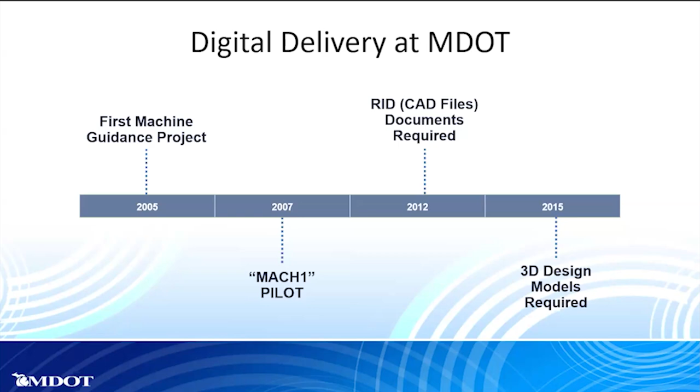But looking back at this 2007 Mach 1 pilot, there's a lot of interesting stuff that I found going back and looking at the proposal and talking with people from MDOT. The first thing that I thought was interesting is that we actually required the contractor to use automated machine guidance.

Usually we try to stay away from things like means and methods, but in this case, we actually told the contractor, hey, you need to invest probably hundreds of thousands of dollars in equipment in order to pilot this technology for us, which I'm sure we got charged for. It's interesting that this is the route we went, when a lot of times we try to stay away from means and methods type stuff.

The other thing I found really interesting about this project is that the same files we delivered to the contractor, 2D CAD files, 3D digital terrain models in LandXML format, it's literally the exact same file types that we deliver today, at least for the purposes of automated machine guidance. When we get into model as a legal document and things like that, that's a little bit different type of information.

But as far as surface information and AMG, same exact file types we were working with back in 2007. And I got a chance to talk to the person who made the 3D model for this project, who still works for MDOT. And he said on the contractor side of things, the project went horribly, which I thought was hilarious.

I guess the contractor couldn't get any of their equipment to talk to our CORS network, which allows you to get really highly accurate GPS signals. So a lot of the project actually ended up being staked conventionally by hand. But they did end up getting their AMG equipment working. I'm not sure exactly what the issue was.

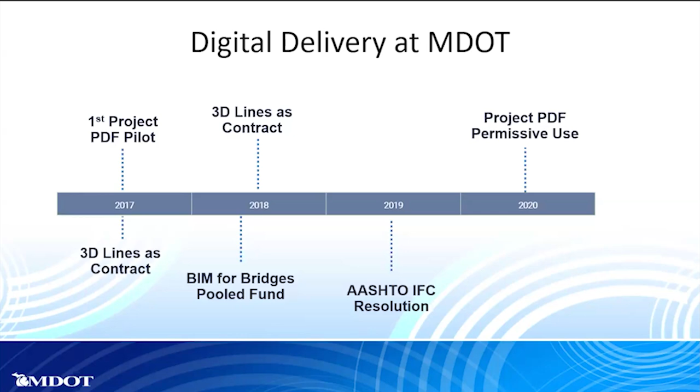I think we have another timeline of some of the more recent pilots as we get into Melissa's portion of the presentation. But I did want to start out by talking a little bit about some of our project PDF pilots. The idea of these pilot projects was to not think of a sheet of paper as an 11 by 17 thing you print out and carry around on the job site, but think of a PDF as more of a digital format or a model where you could see the entire project all at once.

And so that's kind of what this picture is illustrating here, is that basically we took away the limits of the size of a sheet, or the size of the digital sheet of paper that you could put on a project.

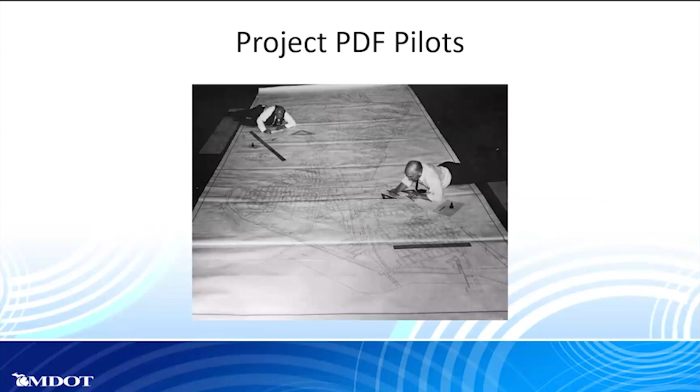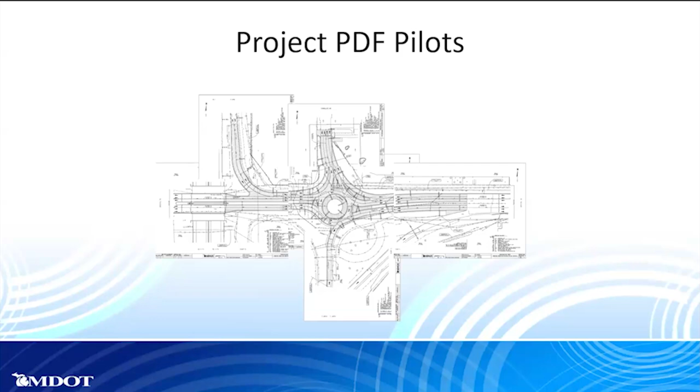I think here we have a little video. This was one of our initial pilot projects where we actually were trying to take this thing to the next level, where it was almost like being in CAD. You can see we have different design files and different layers that you can toggle on and off, kind of like being in CAD software. So you can print those things to PDF.

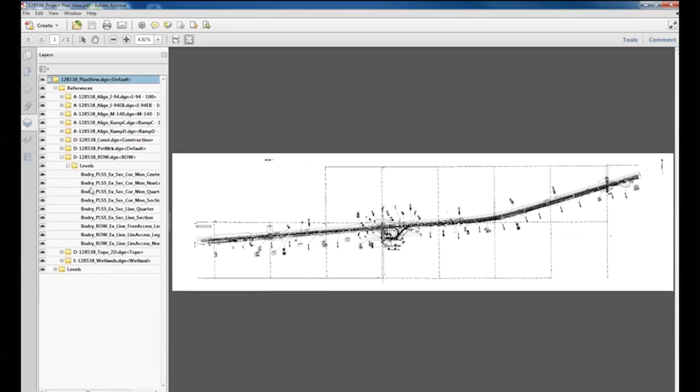We also had these different layer groups, which was really cool. If I go along in the video a little bit, it kind of grouped a sheet of paper based on location or even based on work type. So this is just one PDF that you can very quickly flip between the removal details, the construction details, the pavement marking details, things like that.

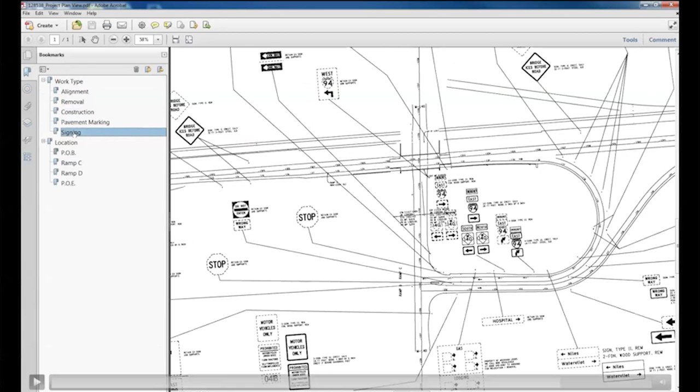Now, what we learned really quickly on these pilot projects is that PDF is not the right way to show some of this information, especially with all these layers. I think I have a slide showing this later, but basically what we found is that the mobile technology at the time, iPads, phones, and even laptops that were not of a certain horsepower, the PDF software really struggled to render all of these layers, and it actually changed the way that we printed a lot of our pilots. So I would say these early pilots, while successful, definitely weren't perfect, and there were things we could improve upon.

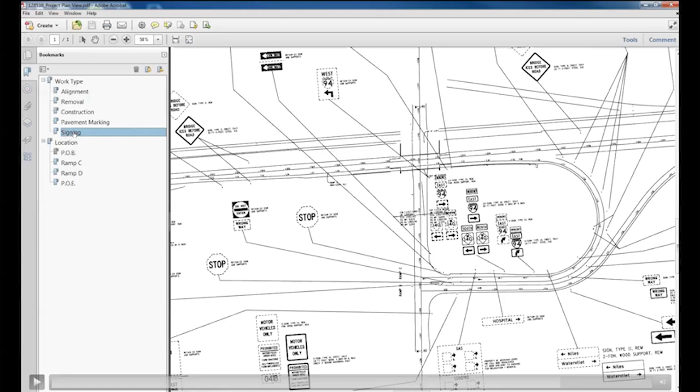So definitely, I would say talk to us if you're thinking of doing pilot projects involving strip maps or really, really large pieces of paper, and we can give you certainly a lot more feedback than I can fit into a 15-minute presentation here.

But overall, some of the early feedback that we got, the designers love it. Drafting time was significantly reduced as far as the amount of time and effort it took to put labels on plans. Estimators and office staff, for the most part, really liked it. We heard from a lot of estimators that said it saved them time. Being able to visualize, especially the staging details and traffic and things like that, was really, really nice. And they didn't have to tape the plan sheets together, which was cool.

Although a lot of times this still wasn't being done necessarily in a digital environment. It was the office staff literally printing out 200-inch sheets of paper and taping it on the wall. So while we initially envisioned this as being kind of a digital process, it really was still a paper process in a lot of ways.

Whoops, hit the wrong button there. Let me go to my next slide.

Some feedback from the field staff: the tablets that we had in 2017 definitely could not handle the layers. We had iPads that were running out of memory, and our construction staff basically had to use their laptops instead of some of their mobile devices. So definitely, like I said before, trying to print all of those layers to a PDF file, it's just not meant for that, at least not on a big 200-inch sheet of paper.

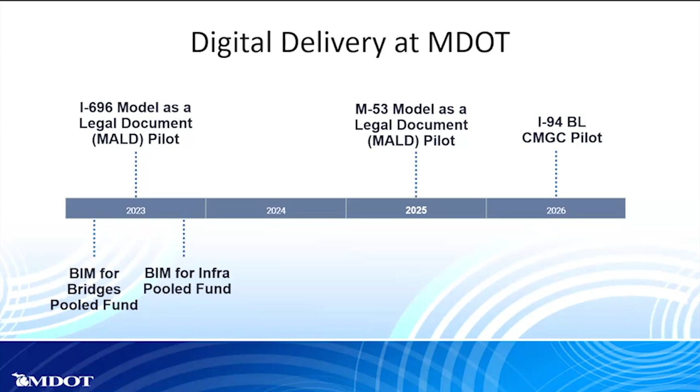But learning from those early pilots, and the work for the BIM for Bridges Pooled Fund, which Brad Wagner is part of and is helping with this presentation, led us to our first model as a legal document pilot on I-696, and our second on M53, which Melissa is going to present about. I'm going to quickly go through some of the feedback we got on the I-696 pilot, since we're limited on time.

The scope of work for this project was replacing a 3-span steel plate girder bridge with a single-span bulb T-beam bridge over the Rouge River in the metro Detroit area of Michigan. This was part of a larger road reconstruction project, which included 8.5 miles of road work and 10 bridges being rehabilitated. The model as a legal document portion only applied to this one bridge; the rest of the project had conventional plans.

This project was let in August of 2022, and construction actually just finished up last winter in 2024. We've had a lot of good feedback doing after-action reviews with the contractor and things like that.

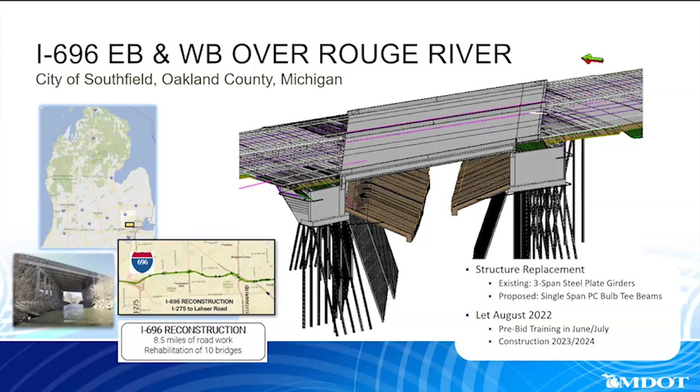As far as the feedback we got on this project, we're going to show the deliverables here. But if I could give any advice to other DOTs thinking about doing this, this next slide is probably the most important one.

Number one, we had the designer on board through construction of the project. Part of their responsibility was updating the 3D model, doing training with the contractor, and capturing lessons learned, so that our next pilot would be even better. Definitely a lot of time and effort was invested into this project, and I wouldn't say we were expecting to save a bunch of money. We wanted to do it the right way and make sure we had the right coordination and the right people in place to make the job successful.

The other thing was the model coordination and training special provision we included in the contract, which required the contractor to develop a BIM execution plan. We had bi-weekly meetings about work being done using the 3D model in the field. It required them to capture lessons learned and give us a presentation at the end of the project. Some extra effort on the contractor side, and things we inspected, just to ensure the project went well. Definitely worth it on our first pilot project, where we didn't really know what to expect. The coordination and partnership between MDOT, the contractor, field staff, survey staff, and construction staff was something everyone agreed went really well on this project, and I think this special provision was a big part of that.

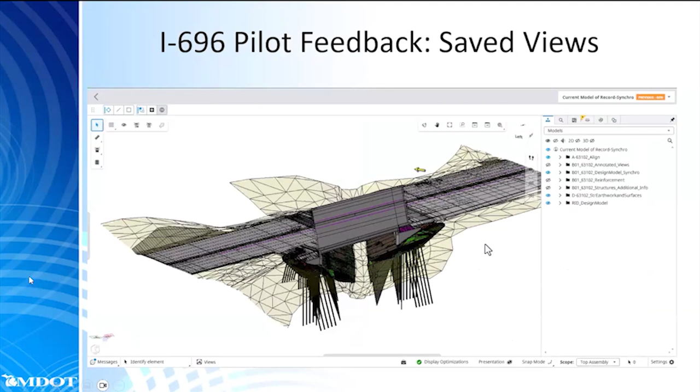So I'll try to get through this as quickly as possible. The software that we used for the model viewer on this project was a Bentley product known as Bentley Synchro. This is just a little video showing that product in action.

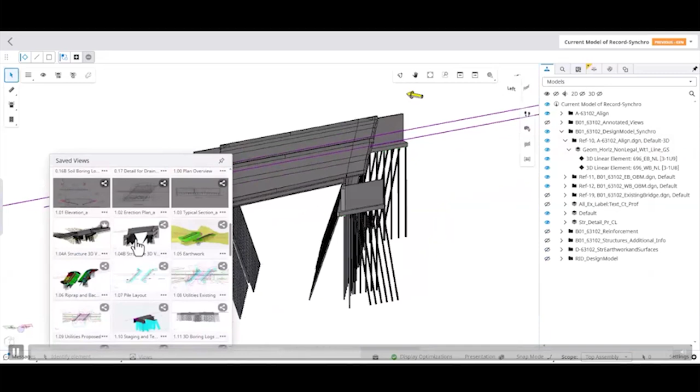One of the things the design teams learned quickly is that expecting a contractor, or somebody not familiar with our CAD standards, to toggle on and off individual layers or files is not really feasible. So what Synchro allowed us to do is create saved views where it was the designer's responsibility to turn layers on and off and give the contractor the typical views they would be used to seeing, kind of mimicking what a plan set would look like, but in a 3D environment.

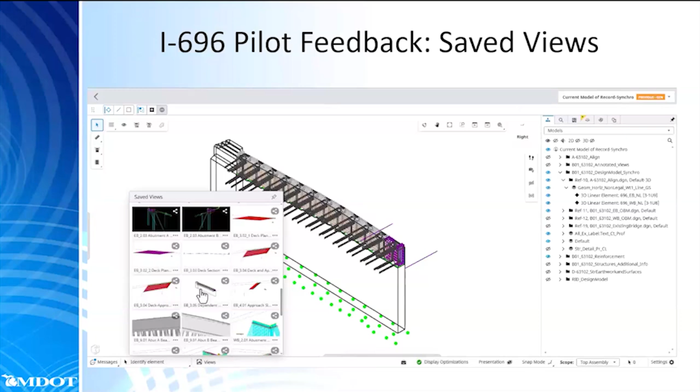Having these saved views was something the contractor pointed to as being really valuable. They said on future projects, they would want these saved views to be more standardized, and maybe even have more of them on a typical project.

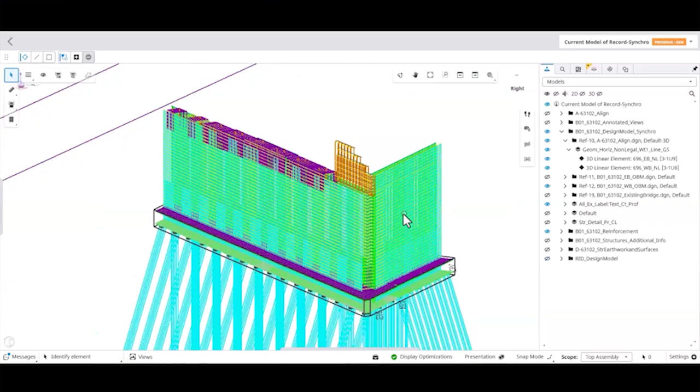The other thing that went really well on the field side of things was this idea of data visualization. Again, this is something the model viewer we used on this project, Synchro, can do. It's basically this idea that when you're in a 3D environment with things that have properties, the idea of toggling layers on and off is almost a foreign concept. It doesn't even matter - you can toggle things on and off based on their properties.

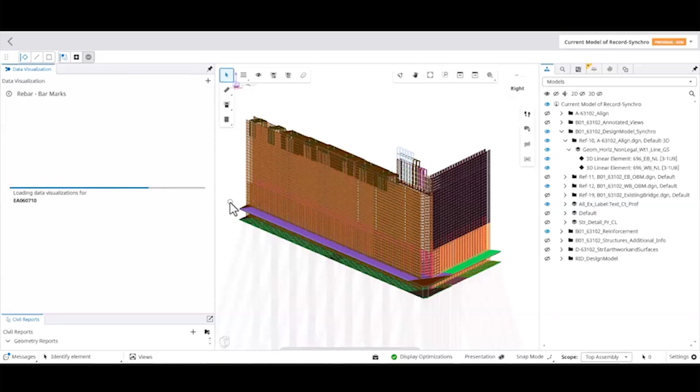So that's what we're showing in this little visual - we have a whole big mess of 3D reinforcement on this bridge abutment, and it's basically impossible to see when you have all of the reinforcement turned on. But one of the things the design team did on this project is they tagged, as an additional property, what the MDOT bar mark was for that particular reinforcement.

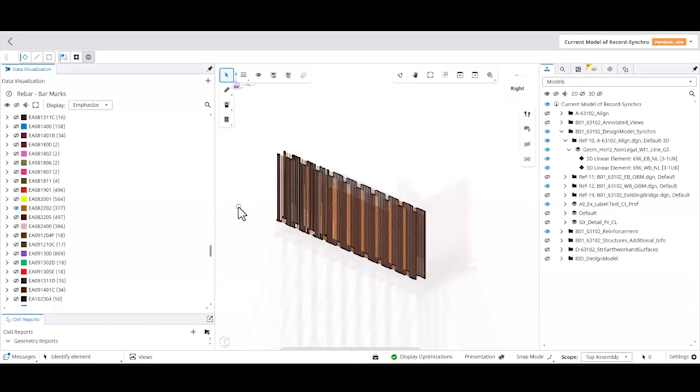By doing things this way, I can go in and turn on an individual bar mark and look at things a little bit different, where it grays out most of the model, and I can just really get into the details and see exactly what it is that I want to see. So definitely the data visualization, and doing as much as you can with extra attribution in the model, is something that can really add value to a model as a legal document project.

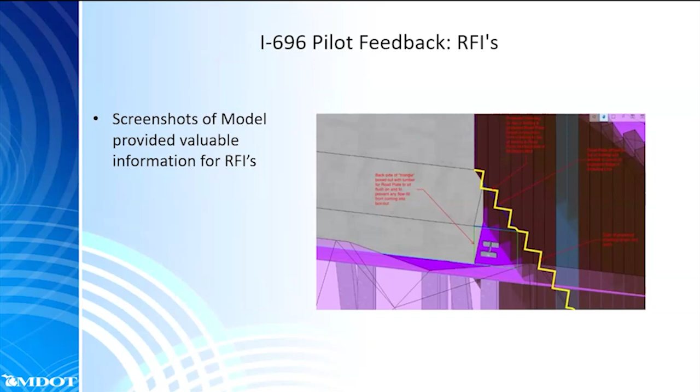Another thing the contractor said is they found the RFI process a lot easier to communicate what they wanted, and really this was just having the 3D model that improved that. We didn't change our RFI process from what it normally is, but the contractor was able to get into the 3D model, take screenshots of exactly what it was that they were looking at, and provide some additional context for the design team or whoever was reviewing those RFIs. So I thought that was an interesting piece of feedback from the contractor.

As far as some of the opportunities, or some of the things that didn't go as well on the project, I don't want to paint a picture like this was all the perfect pilot project where there were no issues and we can't do anything better.

Certainly, the contractor said that getting bids from subs was really, really difficult. And remember, this was just one bridge out of a much larger project. During the bidding phase, they said they had to essentially take screenshots of the model or do their own quantity takeoffs to provide subs, where it was a lot of extra work on the prime contractor to get bids during bidding time.

Another thing we found is that for construction staff, whether it's an inspector or somebody from the contractor's team, the idea that you could take an iPad or some kind of mobile device and take measurements in the field of the 3D model - it's really not feasible. And it's not even that you don't have enough screen real estate or anything like that, it's just being able to take your finger and snap exactly on a point in the 3D model and be confident that you're getting to the right spot. We found that it's just really not feasible.

And even in the screenshot, I'm not sure how well you can see here, but you get little oddities like this, where you have something measured at 4.001 feet. Well, that's probably not what it's supposed to be - it's probably supposed to be 4 feet, and not whatever kind of rounding issue is going on here. So little things with the model viewer like that, too, we found to be an issue.

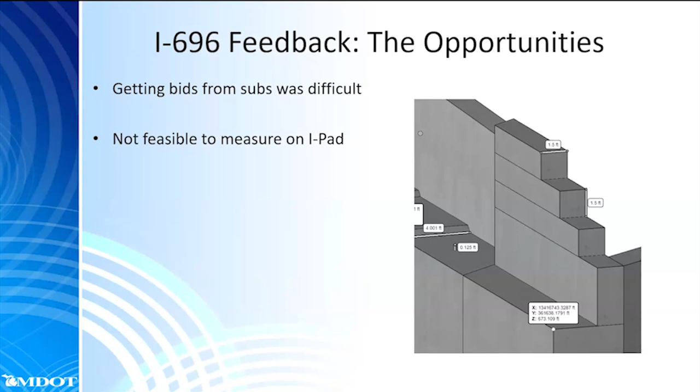Another thing that the contractor said would have been helpful is having more 2D annotated views. I think this goes back to the same point as before: having a 3D model with no annotations isn't really feasible in the field on a mobile device, to go in and take your own measurements and be confident in it. So this thing that looks like a plan sheet on the screen was something included in the model for this project.

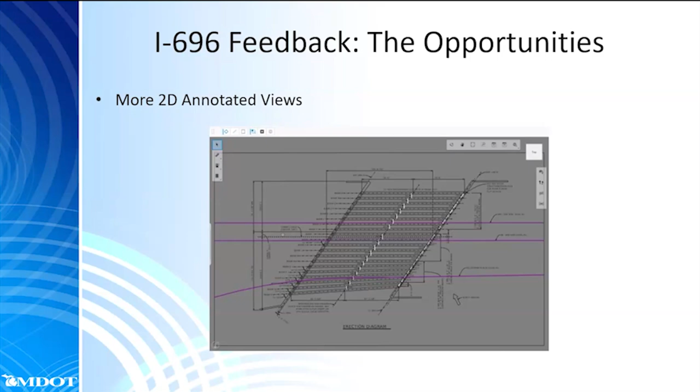Basically, it is the 3D model that you're looking at, it's just been modified to look more like a plan sheet, with actual dimensions and annotations put on it. So something that looks a little more like a conventional plan sheet, maybe not for everything in a typical project, but for a lot of the work, having more of those 2D annotated views was something they pointed to.

Overall, just a summary of the feedback. I think partnership is really important if you're doing any kind of pilot projects. That was a big reason why we were successful on 696, because of the attitude and the partnership that every party brought to that project.

In general, the office staff is really flexible with the deliverable you give them. On the field staff side, it's a little more of a challenge. Things are slow to load on mobile devices, and if you don't have internet connection, that can make things difficult. Overall, I think for the most part, field staff feedback has been that it's more difficult to navigate than a traditional set of plans.

So from my perspective, being part of these different pilot projects, I think it's really important for the plans and the model to work together. This is kind of the simplest example I can think of.

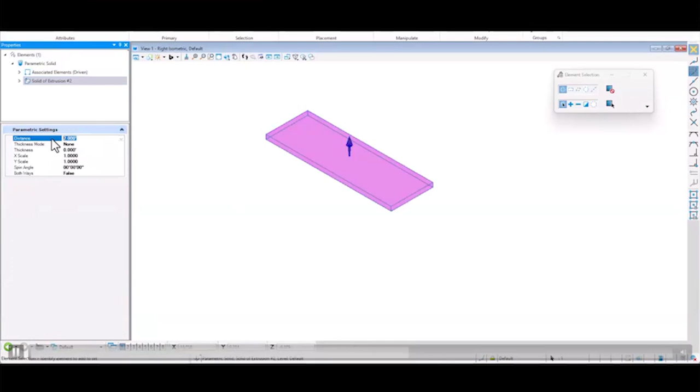We have a nice isometric view, a plan view, and a top view, but everything is linked to the model. So if you change anything in the model - where I just changed this footing from 2 feet to 3 feet - your annotations are all adaptive and update with it.

So the idea of parametric modeling and parametric plans is something I would support, and I think is potentially another way of delivering things in the future, where instead of getting rid of all the plan sheets, you have this hybrid mix where the plans and the 3D model work together.

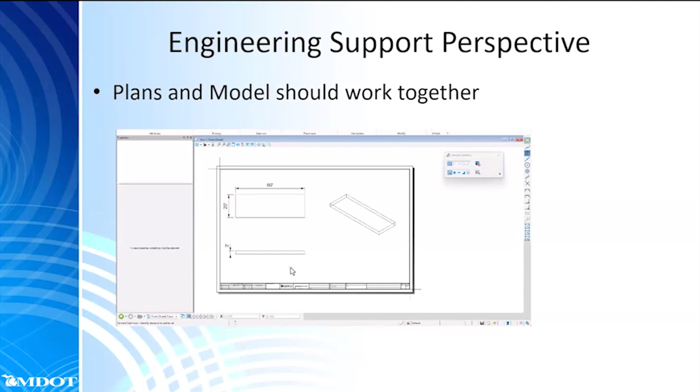So with that, I think I'm going to turn things over to Melissa to talk about our second model as a legal document project on M53.

Do you see my screen okay? I do not think I see it yet. I stopped the share on my end, might try resharing. Yep, we got it now.

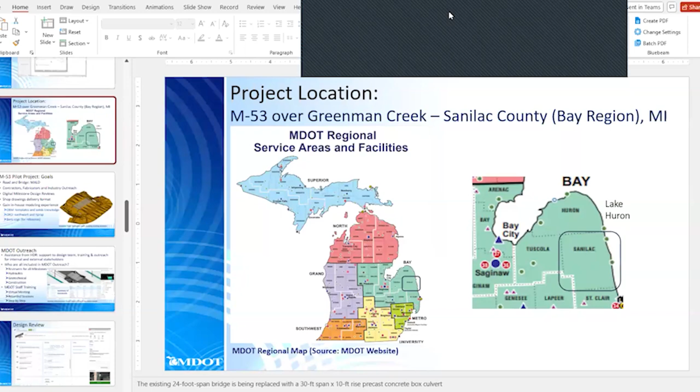Okay, I'm going to give a brief overview of where we're at with our second pilot project, location, type of structure, and we're going to also discuss external and internal stakeholder engagement.

Michigan Department of Transportation is composed of 7 regions. The project is located on M53 over Greenman Creek in Sanilac County, which is part of the Bay region. This county is just next to Lake Huron, so it's on the east side of the state. It's a little bit of a rural area.

In order to get the Transportation Service Center on board, and the region, we did some testing on internet connectivity that was successful, and that helped us get the buy-in we needed from the region and the construction office. The existing structure is a 24-foot span bridge that will be replaced with a precast concrete culvert of 30-foot span and 10-foot rise.

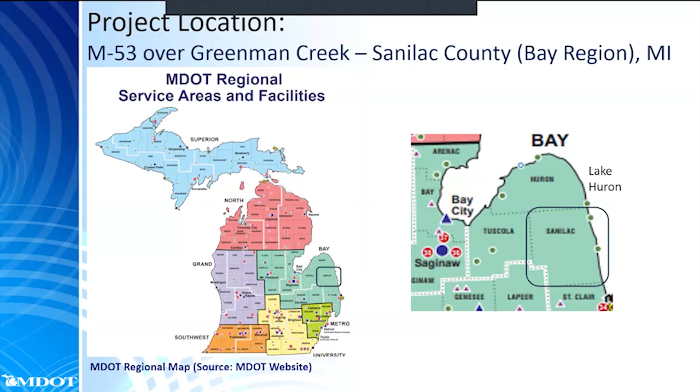Some of the goals for our project are that, as Luke mentioned, the 696 project and MALD included just the bridge. Here, we want the road and the bridge to be part of the contract, the legal contract. And so that's what we're working on.

As part of this project, we have started engaging industry, contractors, and fabricators. We have also implemented digital milestone design reviews utilizing Bentley Infrastructure Cloud.

We want to gain knowledge and establish how the shop drawings delivery format and process needs to look for this project, as we will be requesting them, and they are required for the precast concrete culvert. Shop drawings are required in all culvert projects.

We want to gain in-house modeling experience utilizing OpenBridge Modeler, using templates and solids. We also want to gain more experience with ORD doing earthwork and riprap at these bridges over water.

We are planning to include the boring logs as part of the reference, for information only. The boring logs in 3D are not going to be contractual, but they will be part of the reference information documentation that we provide with every project.

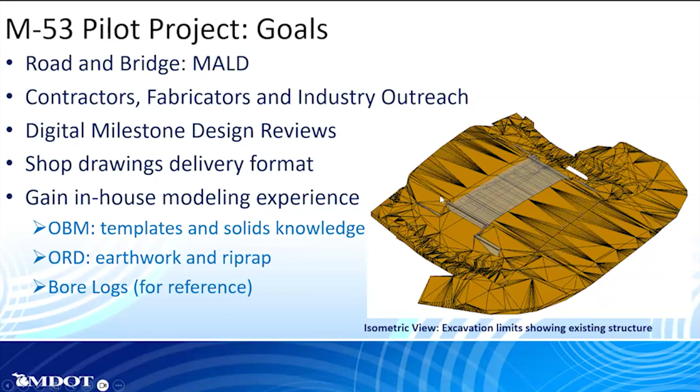In this figure, we can see we're showing the excavation limits and the existing structure, which was also modeled in 3D.

As part of the MDOT outreach, we have assistance from HDR. They are our consultant partners. They are not doing the design, and they will not be the engineer of record.

However, they are supporting our bridge design team with training, and also assisting with training and outreach for internal and external stakeholders. As part of MDOT outreach, we have been having training and conversations with the reviewers for all milestones during the design process - our hydraulics unit, our geotechnical unit, and the construction staff as well.

How have we delivered this training? A lot of our work nowadays is done in a virtual environment that allows us to reach more people all across the state, in our case.

So we provided initial virtual meetings, separated into two different sessions. The sessions were recorded and made available to everyone, so they could go back to those recordings and work at their own pace.

Also, this helped us prepare documentation with step-by-step procedures to use the Bentley Infrastructure Cloud, and how to look at the model, what they're looking at.

Here we have a screenshot coming from the Bentley Infrastructure Cloud, which is a web-based platform, from one of our review sessions. This is just a summary of the comments, and on the right side is the properties of the elements that were selected in the model at the time we took the screenshot.

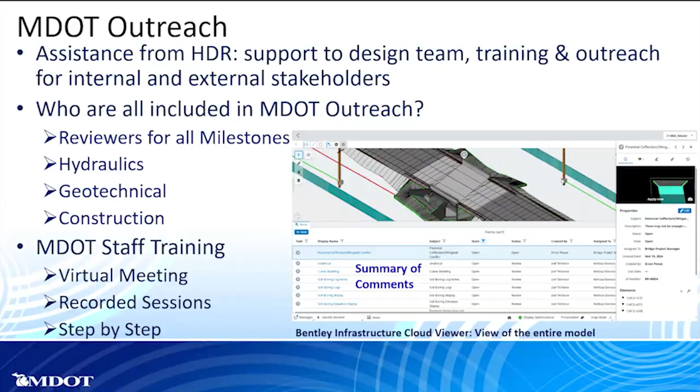This is more of Infrastructure Cloud. We're showing a lot of it because that's what we're using for the design review, not just for the milestone, but also for internal reviews when we need to seek clarification from our hydraulics unit or our geotechnical unit, for example. This is just showing a summary of recent activities of whoever is reviewing it.

Because you need to have a login in order to get into this session, right? And then just a summary of what the comment was. We can tag a location to that comment so that we can have subsequent discussions if it's something that needs to be further discussed.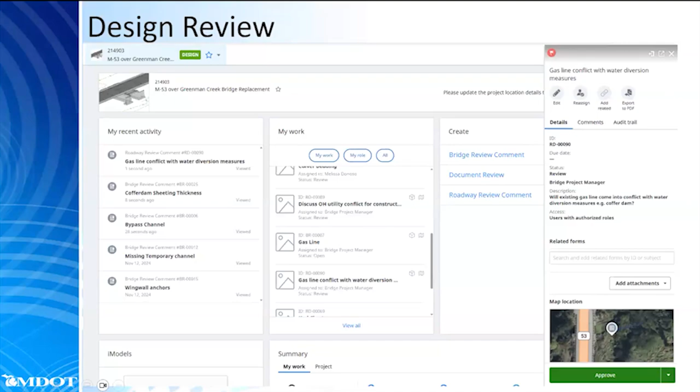As part of our external stakeholder outreach, we also include our state partners, EGLE - the Environment, Great Lakes, and Energy, formerly DEQ. We reached out to them to see if they would have the time and we could get them on board as part of the permit application required for this project, being over water. Due to short staffing, they cannot do the review and learn the process for this project.

So what we proceeded to do for the permit application is create digital sheets, similar to what Luke showed on the 696 project. These digital sheets are created from the model and not annotated in the model, but we can convert them into PDF files. Our intention is to provide key information on our project - what we're doing, the location of the culvert, the realignment of the culvert - but we are not intending to duplicate traditional 2D PDF sheets.

In addition, we have reached out to contractors, fabricators, and industry in general, because we want to make them aware of the project ahead. We want to seek input and feedback - what works, what doesn't work - from them. Similar to the 696 project, there will be a mandatory pre-bid training during the advertisement phase of this project. At this time, the project is scheduled for a September 2025 letting with 2026 construction.

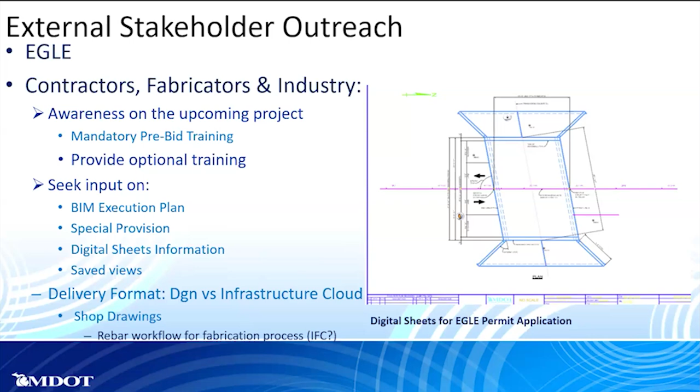So how are we spreading the word, and how are we doing this outreach for stakeholders, contractors, and industry in general? So we are doing webinars. Our first webinar was second week of February, and it was an introduction to the project. We are also engaging with MITA, which is the Michigan Infrastructure and Transportation Association, to assist us with their press release to share the upcoming engagements.

We have been putting together, and HDR has been a tremendous partner with us on these. We are putting together an email contact list. So anyone in that contact list is receiving information about upcoming engagement webinars. We are also doing, via our MDOT e-Proposal, what we call a contractor announcement. It is tied to current letting, and then we are putting information there.

We're also doing, as I mentioned earlier, GovDelivery emails. This is just a snapshot of what it looks like. Just give them an intro to the project, some of the goals of the project, and then it goes into upcoming engagements. We have a calendar appointment, with the series of appointments that we have planned thus far, so that they can have that on their calendars in advance.

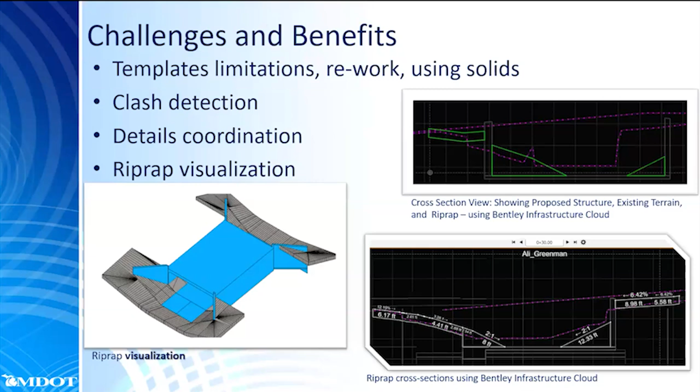We had a lot of back and forth with our hydraulics unit, because there were concerns about us filling in the existing stream bed. So after some additional communication using the model, showing it through Bentley Infrastructure Cloud, cutting cross sections using Bentley Infrastructure Cloud as well, we were able to determine that it was best to reduce the rise of the culvert and do some adjusting with the slopes in order to avoid filling in the existing stream that could cause an adverse effect.

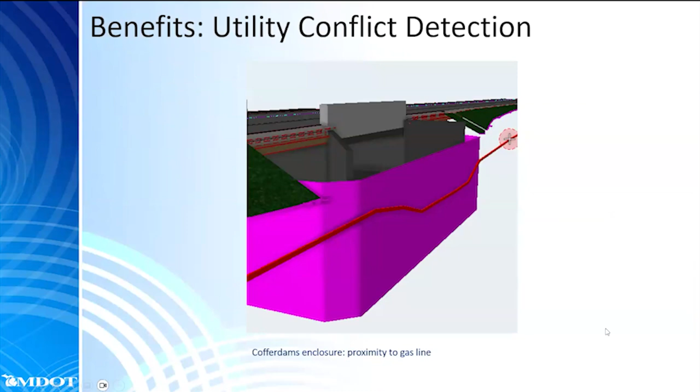As part of the clash detection, we found out that the existing gas line is in close proximity to the temporary cofferdams enclosure for the construction of the project. So this gas line now needs to be relocated, so there is no conflict or close to a conflict, and we comply with MIOSHA requirements.

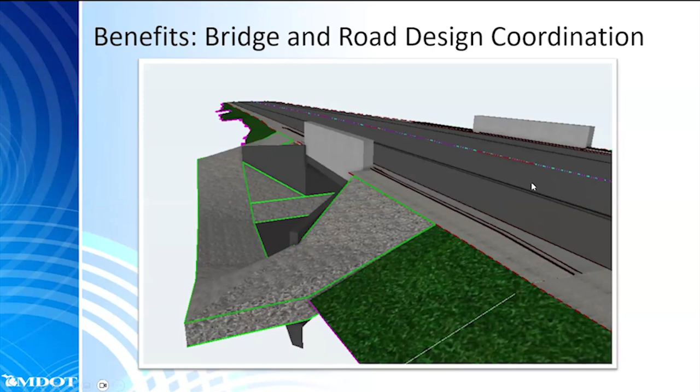As part of the coordination, bridge and road design have been coordinated throughout the entire project. We have a container file with all the sub-files being referenced to it, so everyone can see the most up-to-date information. But we also needed to do some subsequent coordination on shoulder elevations, which helped us determine the wing wall heights and lengths needed to ensure it would work out with the new shoulder location, widths and elevation. So that was very useful and helpful to have a 3D model to go through that.

Another benefit is asset management. We're still getting more into what we do with these, how we're going to have a living document. It's going to help with inspections, with future work that's going to be done. And then hopefully once AASHTO Open API is up and running and the case studies have taken place, we can see how we can exchange data between an OBM ORD model to AASHTO Bridge Management, or AASHTOWare BrM. So we're still looking into that, more to come, but this is some of the things we have done thus far with our second pilot project, and now I will pass it on to Brett.

I think we're running a little bit tight on time, so I'll do my best to go fast.

I want to zoom out and look at the 30,000-foot view of this whole discussion. I think these pilot projects that Melissa and Luke have talked about are pretty awesome, pretty innovative, we're doing some great things. But really, they represent an advancement in just one small area or one small piece of the overall life of our transportation assets. Really one link, if you will.

And I want to touch on several other efforts that we have ongoing related to data-centric workflows.

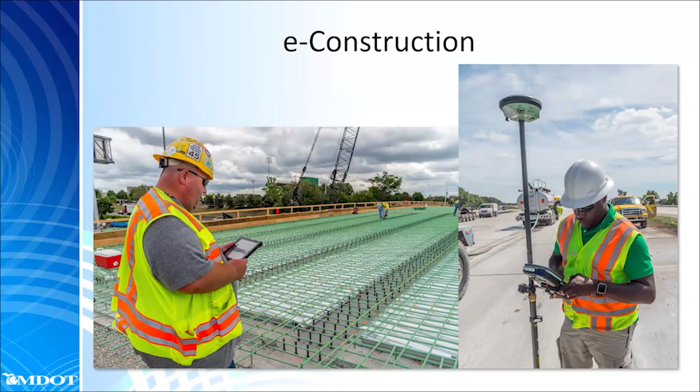Back in 2015, one of the EDC-3 initiatives was e-construction. At that time, MDOT was fairly well down the road in terms of implementing e-construction, and a lot of our practices were showcased. While e-construction is really just an electronic emulation of what we used to do via paper, it really forced people to think about workflows, particularly standardizing and repeatable workflows, which is super important in order to ensure the integrity of data as we expect things to get used by others.

Another thing we just wrapped up last year is our construction tools research project. This one was pretty neat. It looked into the needs and use cases for digitalization, particularly as it pertains to our construction staff and field uses in construction. This project really highlighted how our workforce is changing, and how the demands of our younger generations, how they think and learn, is conducive to working electronically, and really expected, for what it's worth.

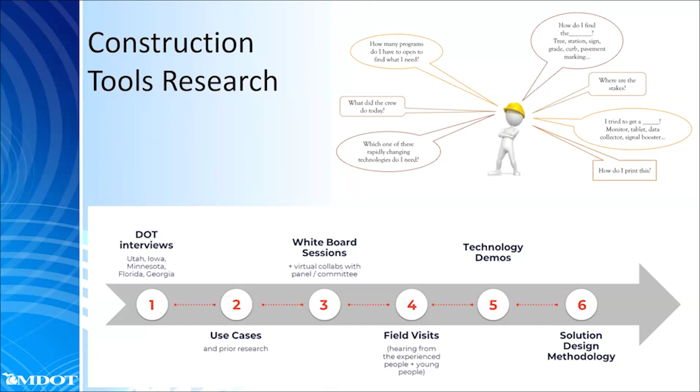One takeaway from this is our field folks, like probably everybody, are getting bombarded from every direction with new tools and technology, which leads to a lot of challenges and questions. The project also explored and evaluated a lot of tools that are currently available. There were discussions about automated machine guidance and demonstrations of that, as well as drone capture and a lot of the neat stuff you can do by capturing images with a drone.

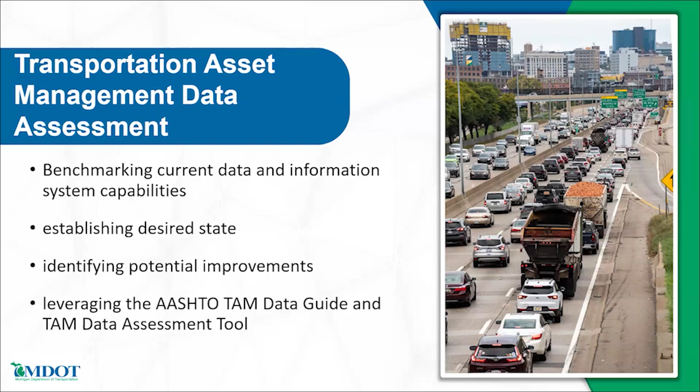Next up, we have our transportation asset management data assessment. This is basically looking at, within our asset management, 16 different classes or asset areas, including pavement, bridge, signals, and several other areas, and really looking at how they're using data, how their systems support and use data, and looking for potential improvements. Ultimately, we want to get to a place where we can enable our asset management systems to better support program-wide enhancements, really to allow for network level insights and make better decisions on how we allocate the money that we have.

Right-of-way to GIS, I think, is a big one. In many cases, our right-of-way maps were hand drafted many years ago, and trying to bring that information into our current environment was really a challenge. So several years ago, we moved everything to PDFs. That was helpful, but not as helpful as it could be, because the information is basically locked into those PDFs. So this effort really looks to digitize that right-of-way information into a GIS environment. Going forward, we're going to make that even more useful by establishing a digital workflow by which new parcels can be ported straight into that GIS environment.

So this one's a bit broader: data integration and warehouse design. It's a mouthful, and probably a little bit more abstract than the others. But obviously, we create a ton of data nowadays, much more than we did in the past. So it's more critical now than ever to organize that data in a logical way, make sure it's manageable and sustainable, as well as scalable for the future.

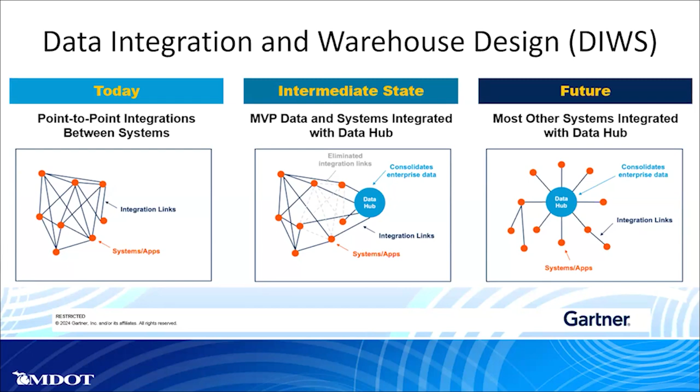So we basically would pull the information from the system of record. We'd get rid of any inconsistencies, and by doing that, improve the quality and enable ourselves to be more cloud smart, or able to adopt a cloud based environment.

So these are just a few of the great things that I think are representative of innovative things we're doing. But there's many more that we could talk about if we had time. But they really—I guess ideas can tend to lead to more ideas.

A couple of years ago, we noticed that people were experiencing change fatigue, getting hit over and over again with new and different things. We were experiencing a lack of traction in a lot of different places, like with these pilot projects—when we look for someone willing to take on a pilot project, sometimes that was difficult to get buy-in. Other times, industry may not have liked what we were doing, and really, in all essence, stopped things in their tracks.

So I think a lot of this stems from our lack of a really clearly defined priority. Everyone's busy, everyone's got a lot going on. So many of the initiatives that I just shared were really limited to one phase of a life cycle, like these pilots designed for construction.

But conversely, we saw a lot of commonalities between a lot of the things that are going on. Everyone's looking to use technology to capture efficiencies. We'd like to get to a point where we create data just one time. Ultimately, I think we strive for better clarity, and using data to do so.